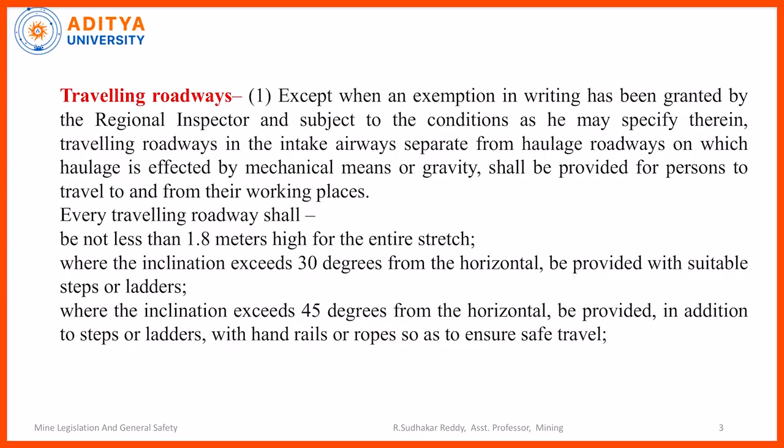So all these things need to be followed by the mines manager. If the inclination exceeds 60 degrees - so 30 degrees needs steps, 45 degrees needs rails.

If it is 60 degrees from the horizontal, in addition to the steps, ladders, rails and ropes, suitable platforms at intervals not exceeding 10 meters measured along the slope should be provided. So if it is 60 degrees, apart from the steps, rails and ladders, a platform should be provided. I think these platforms are required for taking rest.

Sometimes we feel exertion when traveling certain distances, so in such cases you need to have a couple of minutes' rest.

It should be provided with effective means of telecommunication facilities. All traveling roadways should be provided with efficient telecommunication facilities at suitable places, along with an adequate number of digital display boards and communication ports through which important messages or information can be passed. For example, if an accident happens in any mine, the communication should be passed from the mines manager to the miners. In such cases, at certain points, there should be digital display boards and communication ports.

That's why, if miners want to escape, there are better chances of escaping. These are the means through which any important message or information can be easily transmitted or broadcasted to persons working below ground or passing thereby.

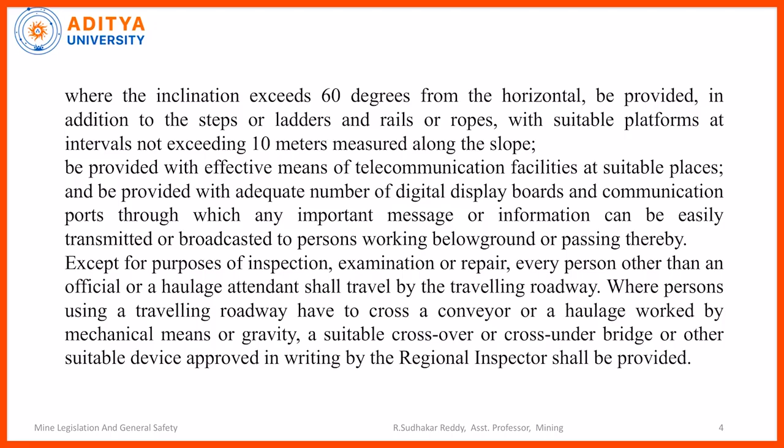Where a conveyor roadway is required to be used as a traveling roadway, suitable guards or fencing of substantial construction shall be provided throughout its length. This is because some miners have to travel along the conveyor roadway to check for problems. So all conveyors should be properly guarded so that people traveling near them do not face any problems.

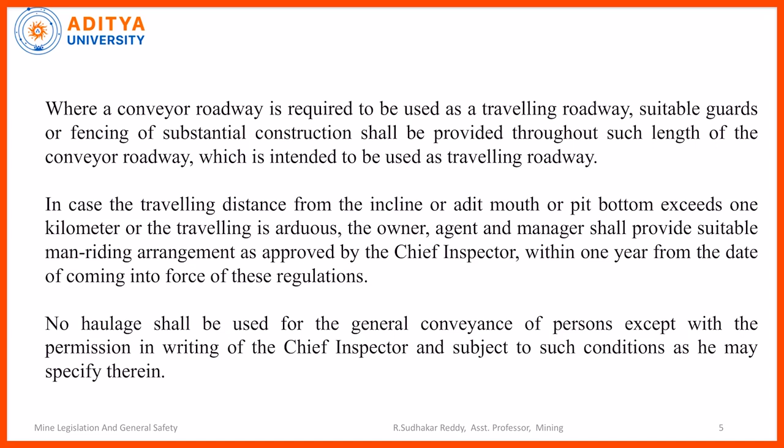In case the traveling roadway from the incline, adit, or pit bottom exceeds 1 kilometer, the owner, agent, or manager shall provide suitable man-riding arrangement. This is implemented in Singareni, one of the mines, since the traveling roadway is more than 1 kilometer and shift timings are fixed, so traveling on foot causes loss of productivity. Suitable man-riding arrangements, as approved by the CIM (Chief Inspector of Mines), must be provided within 1 year from the date of coming into force.

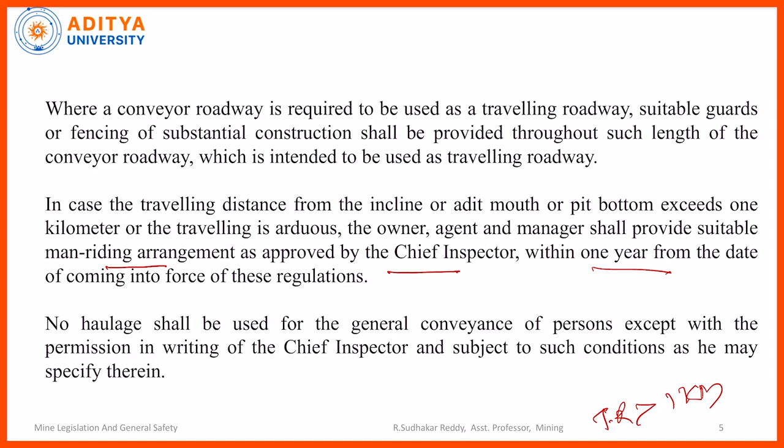So, man-riding arrangement should be of an approved type, approved by the DGMS, Chief Inspector of Mines, no later than 1 year. No haulage shall be used for general conveyance of persons except with permission. So, no miner should travel in the haulage roadway unless permission is taken from the CIM.

Coming to the safety management plan, we have just covered traveling roadways, and in the previous lecture we covered haulage roadways. Now we move on to the safety management plan.

The owner, agent, manager of every mine shall identify the hazards to health and safety of persons employed at the mine to which they may be exposed while at work. Generally this is the duty of the mines manager or safety officer, who should consider the chances of miners getting exposed to accidents. The safety management plan should address all such things and assess the risks to health and safety to which employees may be exposed while at work.

They have to analyze the risks to health and safety at work, and record the significant hazards identified and risks assessed. The safety management plan should address significant hazards and risks, and make those records available for inspection by employees. This is important because employees should have access to the mine's previous accident history so such accidents can be avoided in future, and follow an appropriate process for identification of hazards and assessment of risks.

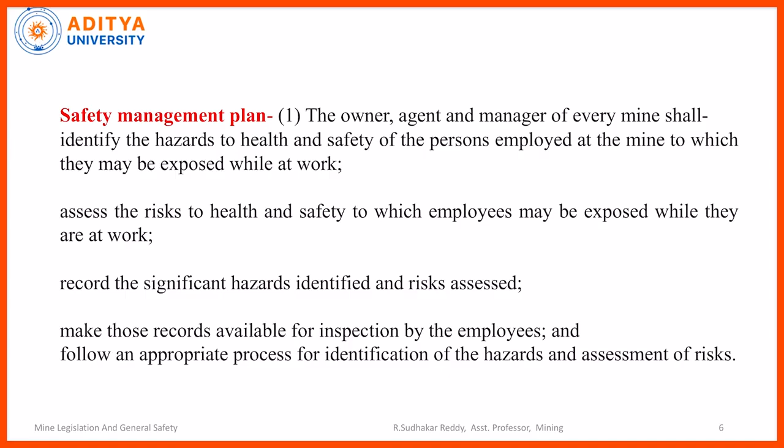Next, the owner, agent, manager of every mine, after consulting the safety committee and internal safety organization (ISO), shall determine all measures necessary to eliminate any recorded risks. These are important things addressed in the SMP, prepared in consultation with the committee and ISO: eliminate, control, and minimize recorded risks, or avoid the risk altogether. This is the main summary of why we prepare the SMP, the safety management plan.

The SMP must also provide all required personal protective equipment, as regulations specify many requirements. For example, if sound levels exceed a certain limit, around 110 decibels as per mining laws, personal protective equipment is required. Similarly, helmets and shoes are mandatory for miners, and some companies supply these free of cost—helmets once every 2 years, shoes once every 6 months, and even raincoats are supplied free of cost.

Based on the identified hazards and risks, the owner, agent, manager of every mine shall prepare an auditable document - this safety management plan. Somebody should make it accountable. For what? Who is accountable? This forms part of overall management, including organization structure, planning, activities, responsibilities, practices, processes and resources for developing, implementing, achieving, reviewing and maintaining a safety and health policy of a company.

So overall safety management plan is an auditable document. Whatever the responsibilities, whatever the practices, whatever the procedures and processes, somebody should be responsible for something. Otherwise, if some party is not responsible, there is no meaning in creating a safety management plan.

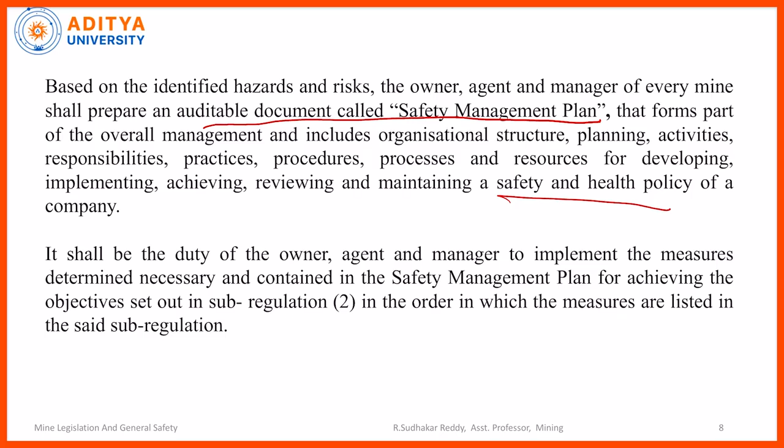It shall be the duty of the owner, agent, manager to implement the measures determined necessary and contained in the SMP, for achieving the objectives set out in sub-regulation 2, in the order in which the measures are listed in the said sub-regulation. So it is the duty of the manager to follow all these things. And the safety management plan, what does it contain?

For example, in yesterday's class we discussed about the surface plan. What does it contain? It contains all HT wires, all water courses, all permanent structures like that. And what does safety management shall contain?

It's a defined mine safety and health policy - this is one of the important things. And a plan to implement the policy - there should be some plans.

And how the mine or mines intend to develop capability to achieve the policies - what are the different training programs which are required to avoid risk and achieve the policy. And principal hazard management plans.

Standard operating procedures - this is one of the important things. If you are using a dumper, there should be a standard operating procedure. If you are using a continuous miner in underground, again standard operating procedures need to be followed.

Ways to measure, monitor, evaluate performance of the safety management plan and to correct matters that do not conform with the safety management plans. So periodically management should monitor and evaluate performance. Is the safety management plan still 100%, or are there deviations somewhere? If there are any deviations, how to rectify it? These are the important things which need to be addressed in the SMP, safety management plan.

A plan to regularly review and continually improve the safety management plans. So regularly we have to review - that is one of the important things, because that's why it is auditable.

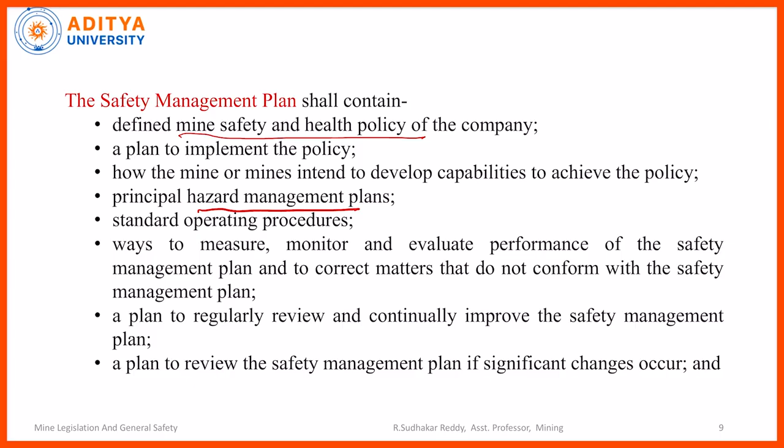A plan to review the safety management plan if significant changes occur. The owner, agent, manager of every mine shall periodically review - just now we have touched on it.

The owner, agent, manager of every mine shall submit a copy of the safety management plan to the regional inspector, who may at any time, by order in writing, require such modifications. So even the regional inspector may suggest some changes if he feels it is required for the safety of the mine.

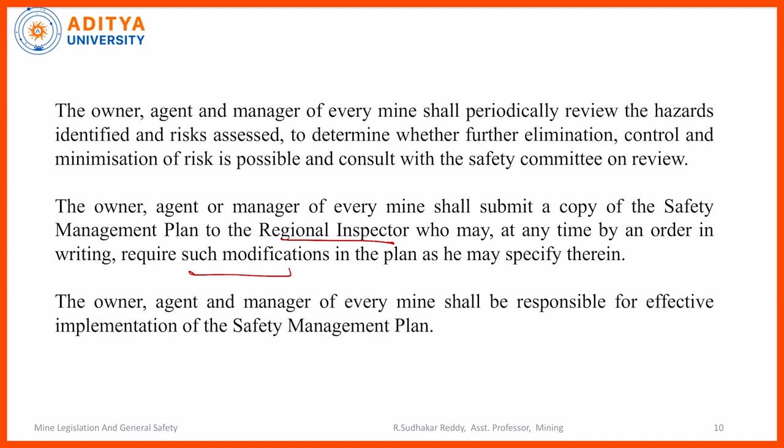The owner, agent, manager of every mine shall be responsible for effective implementation. So as the owner, agent or manager, because they are the sole important persons of the mine, they should be responsible for the effective implementation of SMP.

So we have covered traveling roadways, we have covered safety management plan. Coming to the spoil banks and dumps - dumps means overburden where it has to be heaped. While removing the overburden, the topsoil shall be stacked separately - this is important because it is required for plantation purposes.

The slope of the spoil bank shall be determined by the natural angle of repose of the material - this is important, how the slope is decided. But in any case, it should not exceed 37.5 degrees from the horizontal. Any spoil bank exceeding 30 meters in height shall be benched, so that the bench height should not exceed 30 meters. These are common, and the overall slope of this dump should not exceed 1:1.5.

So whenever there are dumps, the height of the dump should not exceed 30 meters, and if it exceeds 30 meters, you have to keep it benched like this. I am just drawing the diagram like this. The slope of any dump should not exceed 37.5 degrees - this is the slope, I am just writing. And the overall slope, once again I want to draw, just wait - this overall slope should not exceed 1:1.5.

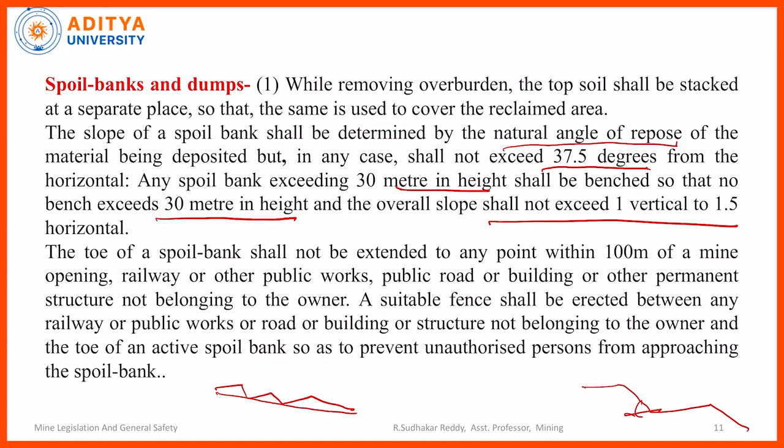What is 1? What is 1.5? One is the vertical, another one is the horizontal. This is the 1, this is the 1.5. So in case of dumps, these things should be followed, and the dump should be far away from public places, to ensure safety.

And the toe of the spoil bank shall not be extended to any point within 100 meters of a mine opening, railway, or other public works or public road.

This is what I want actually, because if you keep these dumps near the railway or near the public works, all the wastage will be carried to those places if the wind is powerful. That is why the minimum distance should be 100 meters. If this minimum distance is not managed, then a suitable fence should be erected between the railway, public works, or road building and the dump. If you are not able to maintain it, you have to create a fence. If you are able to maintain it, well and good.

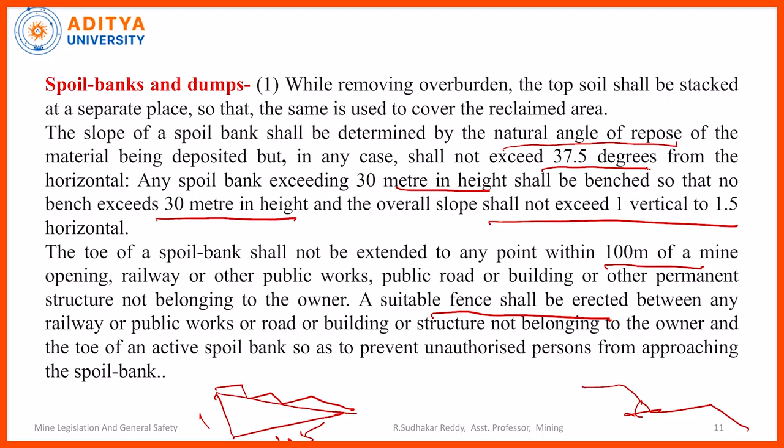And strata control and monitoring planning. Apart from the safety management plan, strata control monitoring plan, also called SCAMP, is most important. The owner, agent, manager of every mine shall prepare, formulate and implement a SCAMP based on scientific study. In case of safety management plan, scientific study as well as trial and error is also required. This is based on scientific study concerning geotechnical data, information, method of development, extraction of coal, excavation required.

This includes a support plan to secure the roof. Generally, the support plan is required for securing the roof and sides of below ground places and shall be subject to revision with a change in condition. For all workings below ground, the owner, agent, manager shall submit a copy to the regional inspector at any time. This is meant for securing the roof as well as the sides, and similarly, just like SMP, the strata control and monitoring plan should be given to the regional inspector, who has power to suggest something for the safety of the mine.

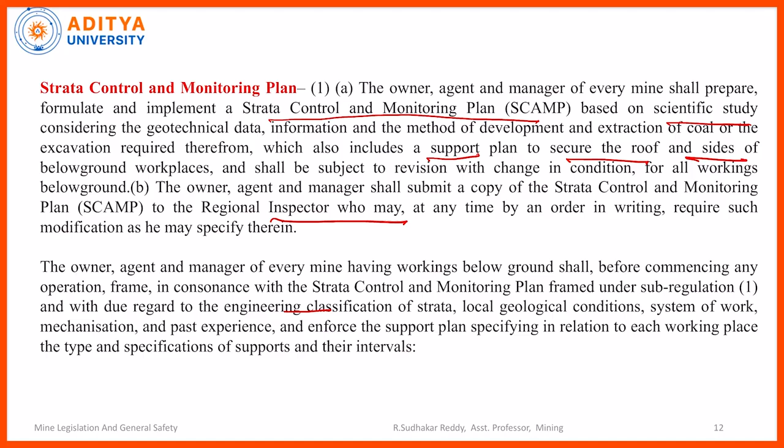The owner, agent, manager of every mine having workings below ground shall, before commencing any operation, frame in consonance with the strata control monitoring plan framed under sub-regulation 1, with due regard to the engineering classification of the strata, local geological conditions, system of working, mechanization, past experience, and enforce the support plan.

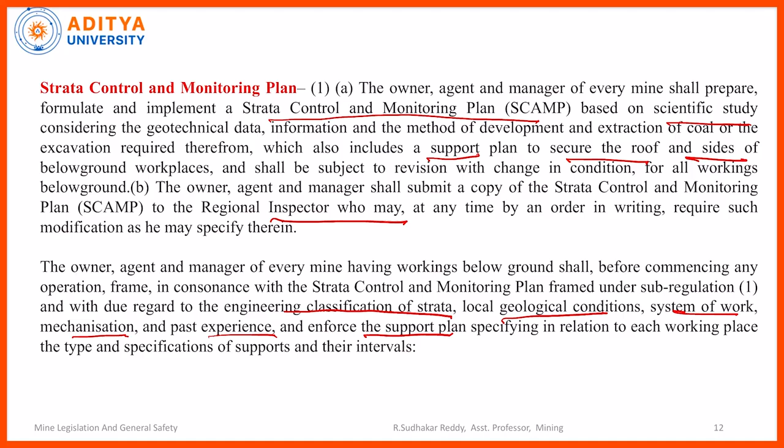So whenever you are making a SCAMP, strata control and monitoring plan, you have to take into consideration geotechnical data, method of development, extraction of the coal - all these things - and then frame the SCAMP. The manager should, at least 30 days before commencement of operation, submit the copy to the regional inspector. This is one of the important things, showing which type of support at which roadways, all these things.

The manager should hand over copies of the support plan framed under sub-regulation 1 and 2 in English as well as in a local language. For example, in Telangana, a lot of underground mines are there, so it is Telugu and English - local language understood by the majority of persons employed in the mine, together with illustrative sketches.

Generally, a sketch speaks a lot more than language - that's why people say 'figure'. I always insist students draw diagrams whenever required, which carries more marks. This is one of the important things. And these SCAMP copies should be posted wherever required, in conspicuous places, so they are visible and people can see them many times.

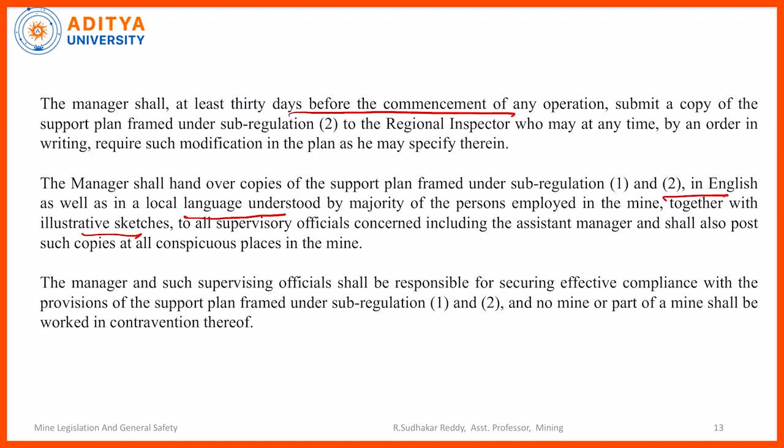The manager and such supervising officials shall be responsible for securing effective compliance. The manager is one of the important persons responsible for enforcing this strata control and monitoring plan. The support plan shall include the system of monitoring the supports, measurement of strata behavior, resetting of supports, provision of temporary supports, replacement of old supports, withdrawal of supports, clearing of falls of ground. This data, the SCAMP should address which type of support is to be withdrawn, setting of supports, temporary setting of supports, all these things.

The support plan shall also include the implementation strategy of the plan, training, inspection, supervision policies. So not only inspection and supervision policies, it should also give training. The owner, agent, manager should formulate and implement a code of standing orders - similarly, just like SOP for machinery, here also standing orders are there for withdrawing or setting of support. The system and organization for procurement and supply of supports of suitable material, adequate strength, in sufficient quantity - this is one of the important things.

Sometimes, especially in government agencies, some people are corrupted, and that's when it happens. They take bad quality supports which results in accidents.

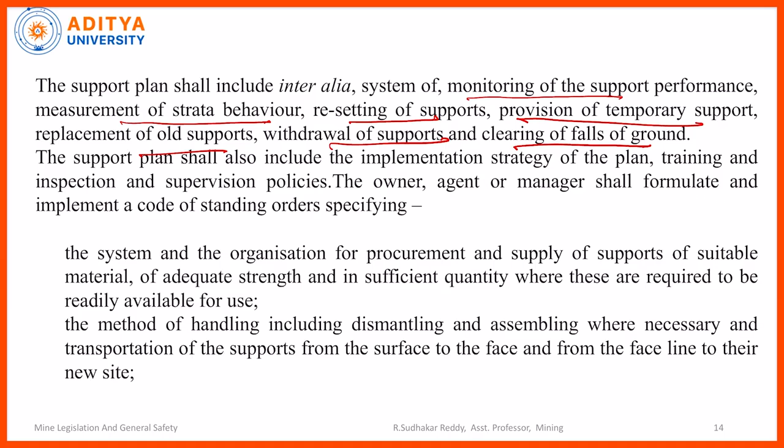The method of handling, including dismantling, assembling where necessary, and transportation of support from surface to the face and from the face to the surface, should be addressed in the SCAMP, strata control and monitoring plan.

Coming to precautions against spontaneous heating, one should understand what spontaneous heating means. It is self-heating. If you keep coal in a place where air doesn't enter, the coal gets heated in itself and gives flames. That is called spontaneous heating. The following precautions shall be taken against the danger of spontaneous heating.

The seam or section shall be worked in panels, meaning divide and rule, having independent ventilation in such a manner that it is possible to isolate one from another easily when necessary. Where the seam or section has already been developed without complying with such regulations, artificial panels should be created. In case the mine is developed without panels, artificial panels should be maintained.

In determining the size of the panel under sub-regulation 1, due consideration shall be given to enable complete extraction of the pillars within the incubation period. The incubation period is the time that elapses between the first fall of coal and the first sign of heating. Whatever coal is in the panel or district should be extracted before the incubation period ends.

No coal, shale or other carbonaceous material shall be left or stacked below ground where removal of the fallen coal out of the mine is not practicable. The area should be effectively sealed off.

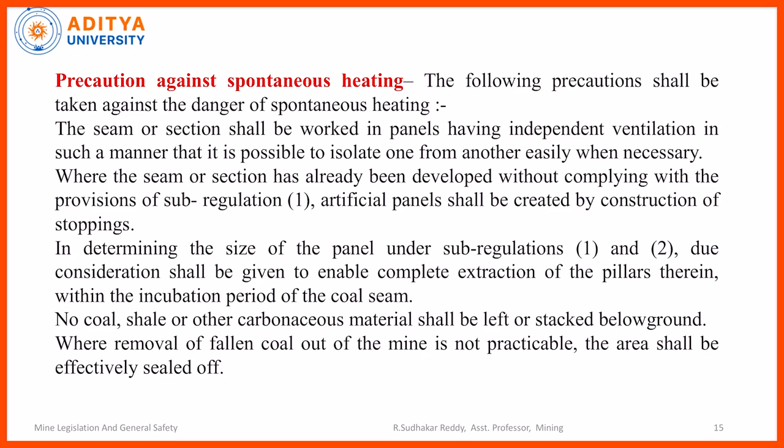In case you are unable to take out coal within the incubation period, it should be sealed off, except where otherwise permitted by the chief inspector by an order in writing and subject to such conditions as he may specify. No extraction of pillars in any seam or section shall be commenced until fire dams or stoppings have been provided. So in case of danger, unless fire dams or stoppings are constructed, you should not do any extraction or reduction of the pillars.

In the fire dams or stoppings built in entrances which are to be kept open for ventilation or haulage, suitable doors or openings may be left, and bricks and other suitable materials should be kept available in the vicinity. This is so they can be closed whenever any emergency arises.

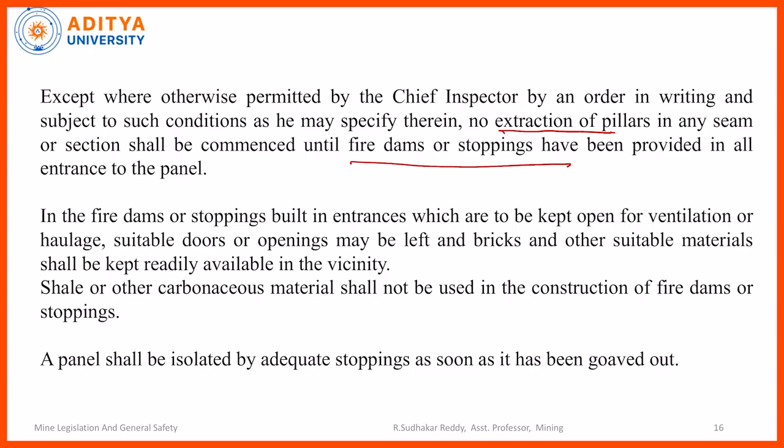A panel should be isolated by adequate stoppings as soon as it has been goaved out. This is one of the important things. Once production is completely done in the panel, it should be goaved out and properly separated.

All isolation stoppings erected to seal off the goaves, or to isolate old, abandoned or disused workings, or to isolate areas affected by fire or spontaneous heating, shall be plastered with cement and whitewashed. This is one of the important things. If you are doing sealing off, it should be plastered with cement, and whitewashed so that if something is coming from the sealed off area, it can show some signs. That's why it should be whitewashed.

Sufficient material for dealing with fire shall be kept readily available below ground for transport, and a sufficient number of persons should be trained. So in case spontaneous heating is going on, you should have sufficient material available for quenching the fire, and similarly a rescue team should be readily available.

The result of every test referred to in sub-regulation 12 shall be recorded in a bound page book kept for the purpose, and shall be signed and dated by the person carrying out the test. So all sealed off areas shall be monitored and tested, and whatever test is done should be maintained in a book, and any strange observations should be notified.

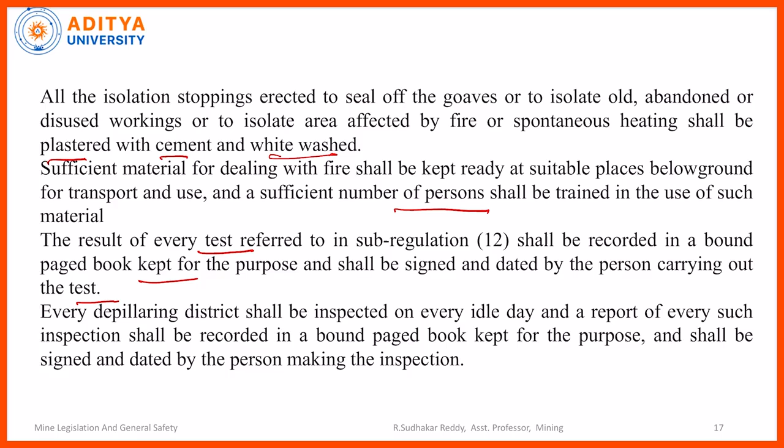Every depillaring district shall be inspected on every idle day, and a report of such inspection shall be recorded in the bound page book. Similarly, just like sealed off areas, the depillaring district should also be inspected.

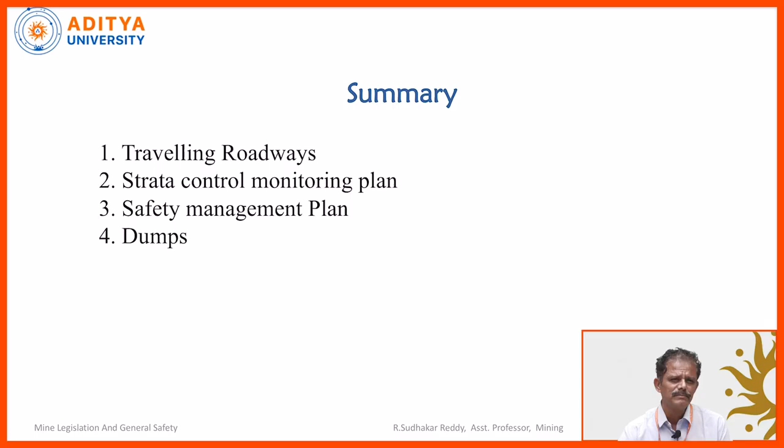In today's summary, we have covered traveling roadways, strata control monitoring plan, safety management plan, dumps, and all these things. Thank you.